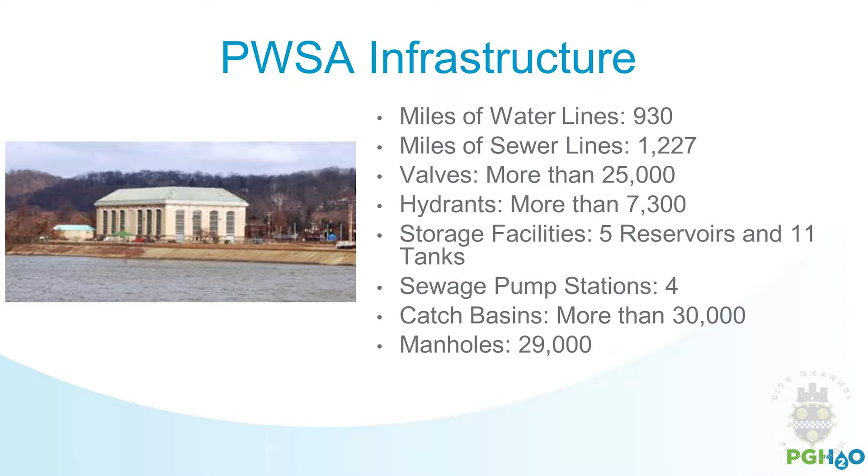Just want to give an idea of what kind of infrastructure, what quantities we have. We have about 930 miles of water line, about 1,200 miles of sewer line, more than 25,000 valves, more than 7,300 hydrants, storage facilities with 5 reservoirs, 11 tanks, 4 sewage pump stations, over 30,000 catch basins, and 29,000 manholes.

A couple things I'd like to point out from this slide. There's only one main treatment plant for the city, in Aspinwall. We also operate Millvale. That's pretty good planning way back when, 100 plus years ago, when the city was laid out and this plant was designed to feed the city. One major treatment plant - that's good planning.

Also, sewage pump stations - there's only 4. That means the original planners took advantage of gravity, took advantage of all our contours and hills within the city. Basically, if you eliminate pumps and use gravity, you save on electric costs. One of your 3 biggest costs with the utilities is electricity.

Now, don't get too scared with the slides. It is more for me to talk from.

Our engineering department right now currently has about 84 projects moving through the department in some form, some phase. Some are completed, a lot are in construction, some are just beginning. We have a staff of about 24 people, so I'm very proud of our staff and the amount of work we actually manage going through there.

About 36 projects are in construction, 4 are just beginning, and 23 are in closeout. Now, Joey's already mentioned funding sources - I'd like to talk a little bit about that. 44 of our projects are funded from bonds, and Mr. Tolbert talked about bonds. Other forms of funding include developer funding. Especially with all the development going on right now, 24 of our projects are developer-funded projects.

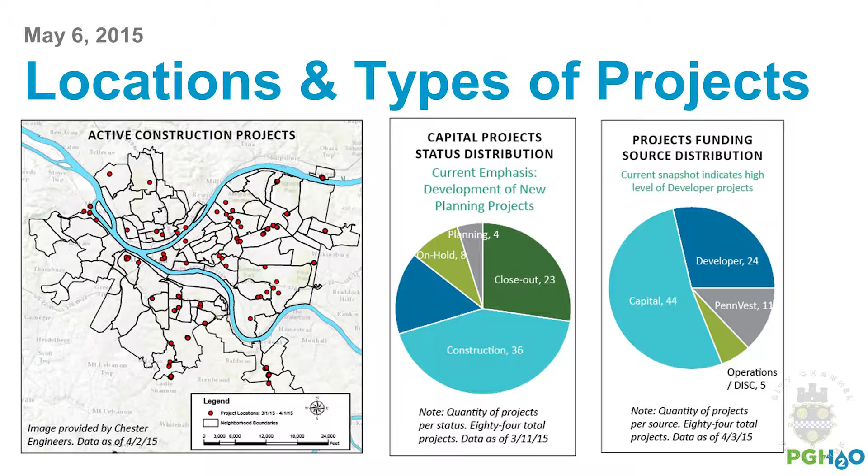Sewers - I've got a slide a little bit later in this presentation that'll show you some criticality measurement, if you will. But sewers are also age and location, but also volume - is this a particular area that's having problems? We'll take a look at it, because a lot of areas have basement backup issues within the city that we look to deal with, so that does drive a lot of our sewer projects as well.

Our capital improvement program is a 5-year program. Please don't pay too much attention to the graphs, it's more for me to talk from.

$50 million a year is still hundreds of years of replacing the system, so we need to look to ramp up, but $50 million is more than we've ever done before. To give you an idea of the overall magnitude, by the end of 2019 we're about $430 million invested back into the system. So we are very proactively looking at bringing the system up to standards.

Also, what comes into play is alternate funding and grant programs we've been taking a look at—how can we bring the system into, say, a 100-year replacement cycle where we look for the end of life of a pipe. Once again, these are all problems that utilities have to deal with.

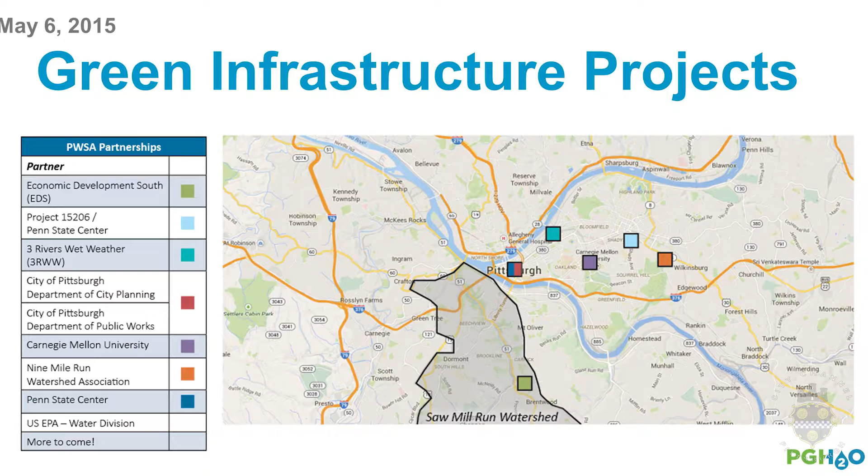This is a big topic that's moving forward, and it's definitely an approach to solving some of our problems. I'll talk about one project with green infrastructure, and I hope not to steal James' thunder too much: the Maryland Avenue, Shady Side area.

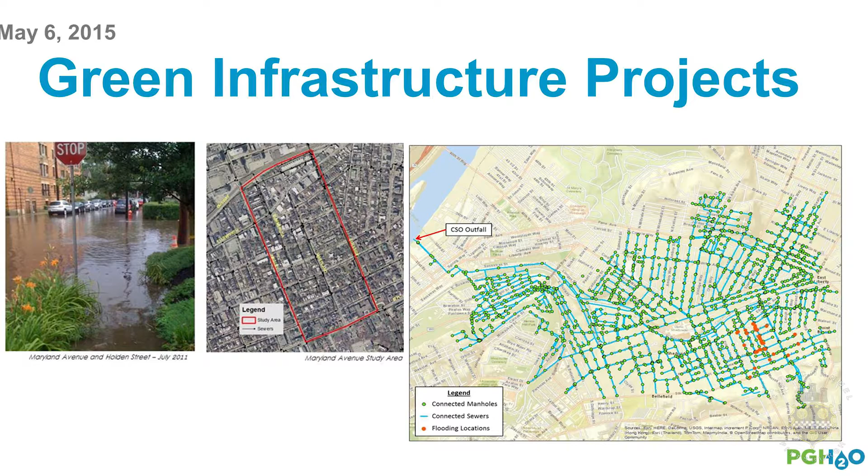We looked at basically the boxed area in the middle picture there. Part of the problem is no matter what we do, we can renew the sewers, we can make the sewers larger, but there's too much water falling too fast in that specific area. You can't get out of that area without a major investment to go all the way to the river. So what do you do to solve this problem? One tool for doing that is green infrastructure, which James will talk about.

Just to summarize some of our projects: I mentioned our filter rehab project. We have a project at our Bruecken pump station with valve replacement. We have a SCADA project, the Supervisory Control and Data Acquisition System — basically remote control, remote data access of our various facilities and more updated control and data logging, allowing us to make better decisions and a more modern approach.

Clearwell upgrade — the Clearwell is right here in Aspinwall at this plant. It's very old, and it's something we're looking to address in the next 5 years.

We just finished a transmission main rehab on our 60-inch line. One good thing about this is we used trenchless technology — rather than digging up a whole sewer and replacing it, we look at lining it with some kind of lining, bag, or coating. It basically renews the sewer without having to excavate the entire pipe. It's much more cost effective, you get a lot of life out of it, and again we're trying to stretch the capital dollars. The rest of the projects are various pump station projects and water line projects.

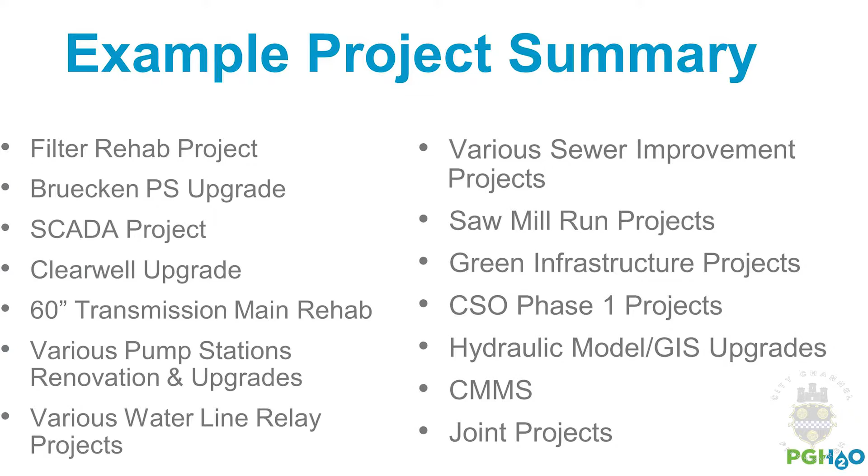Let's see — sewer improvement, the green infrastructure projects. I mentioned some of our consent order, sewer, wastewater spending later in our program — that's our CSO Phase 1 project. And joint projects: another thing we do for extending the funding as much as possible, especially in recent years, is looking at joint ventures. If the city or another utility is going into a street and replacing their infrastructure, we'd like to get in on that with them and share some of the work. If we're both in the same street at the same time, we could share some of the cost of repaving and redoing the street. So again, we're spreading the dollars as far as we can. Thank you.

My name is James Stitt. I'm the Sustainability Manager for the Pittsburgh Water and Sewer Authority. Part of my job involves just about everything that we do, because in some way, shape, or form I usually get pulled into something every day that's new and different.

What we're trying to do is incorporate this idea of sustainability throughout our entire system. We want to look at everything we do from a perspective of: is it cost effective? Is it efficient? Is it in the best interest of the people and the planet we have to deal with, as well as being economically sound and feasible?

A large part of my job involves stormwater management and green infrastructure, something Jim talked about a little bit earlier. You heard about the consent orders and consent decrees that Alcosan has, and the consent orders that municipalities have, basically demanding and requiring us to remove those overflows and reduce them from happening and contaminating our rivers.

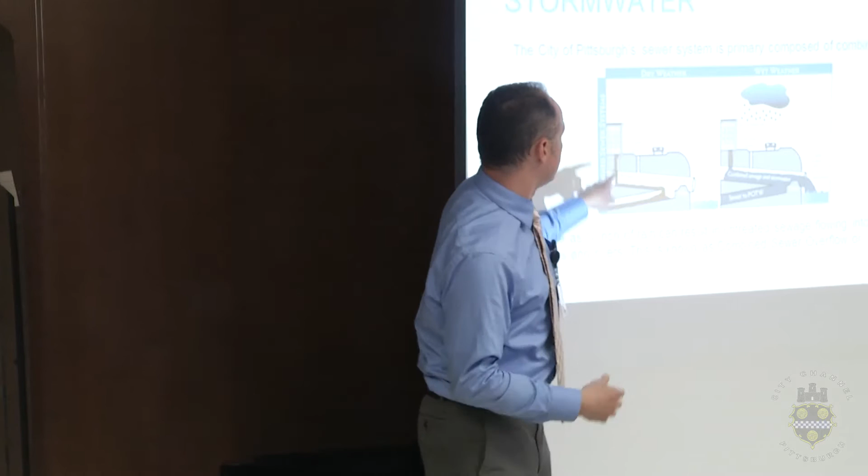On a normal dry day, the sanitary sewage that leaves your house drops down into your drain pipes, into the sewage pipes, flows along, and then makes its way to the treatment facility downstream. When we get heavy rains, that water collects on the rooftops, the roadways, the sidewalks, and then flows into the drains and catch basins along there.

If it's a heavy enough storm, that water falls into that same pipe and will overflow into the river, because this pipe on its way to the treatment facility no longer has any more capacity to carry any more water. That water has to go somewhere, and if this opening wasn't here at the river mouth, then this pipe would back up and that water would come back up into your basements or into your drains.

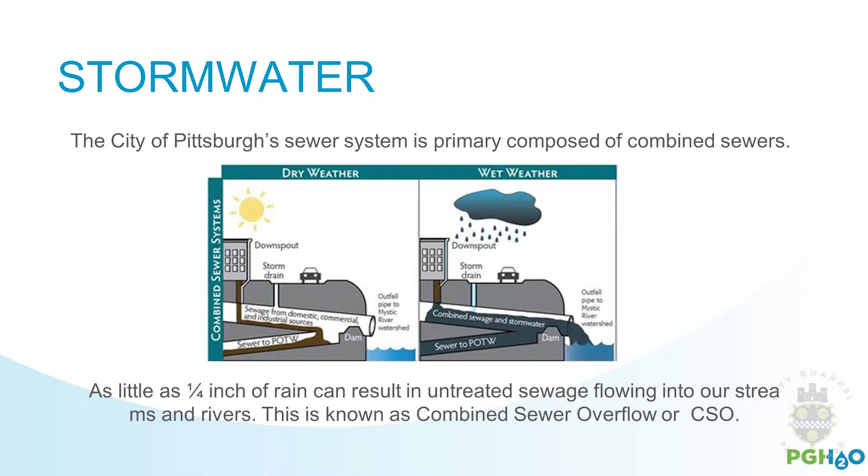So, problem with that, we end up with contaminated rivers that have E. coli and other bacterial pathogens in them. About 70 days out of the year, we will have this problem. As little as 1/4 of an inch of rain can cause a particular outfall to activate and dump sewage into the rivers.

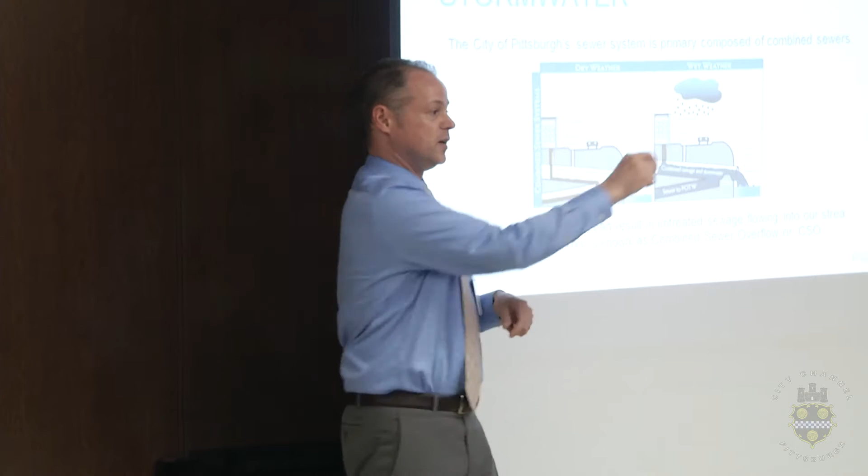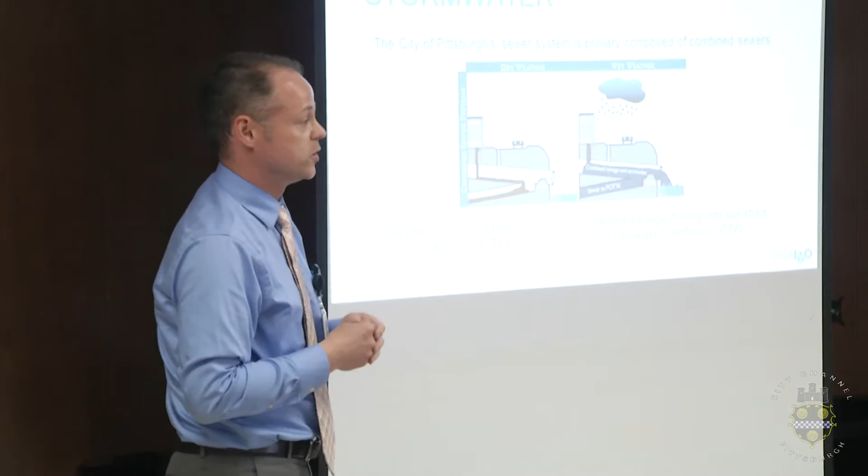You'll notice there's not a whole lot of sewage mixed with that stormwater, but it's kind of like the old vintner. If you're a winemaker, and you have a barrel of vinegar and a barrel of wine, you take one drop of wine and put it in the vinegar, it's still vinegar. But if you take one drop of vinegar and put it in the wine, you now have a barrel of vinegar. Same thing with the sewage - if you take one drop of sanitary sewage and mix it with that rainwater, it's now all sanitary sewage. It's all raw sewage. It's been contaminated.

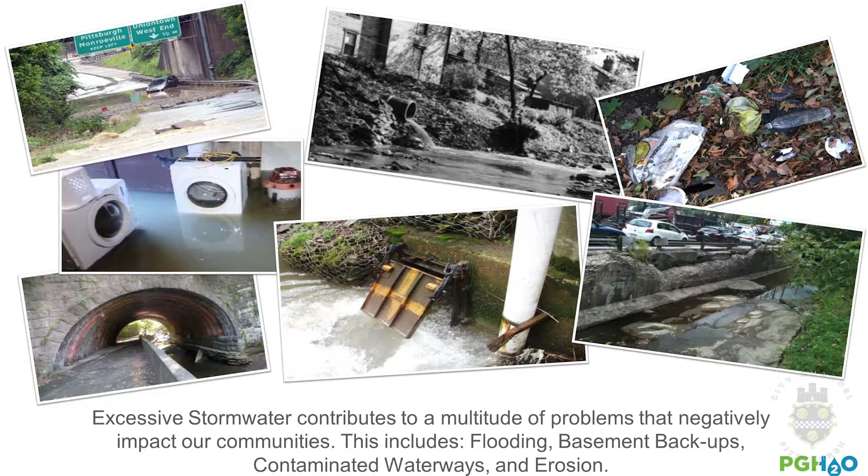So our job is to try and treat this, because what it causes is things like flooding and basement backups. This here is an outfall that's activating - that water is probably due to a rainfall earlier that day or occurring at that moment. This large gate will open up and just flow right out to the river. Then we end up with older pictures like this, showing how things were originally constructed. We've moved ahead of that, but still, when we get those heavy rains, we're still doing the same kind of thing, contaminating our waterways, if you would.

One of the things we want to try to do is keep that water from getting into the pipes in the first place. That stormwater falls from the sky, hits the ground, rolls across the pavement and the asphalt, and ends up in a sewer. We want to prevent it from getting to that sewer in the first place. So how do we do that?

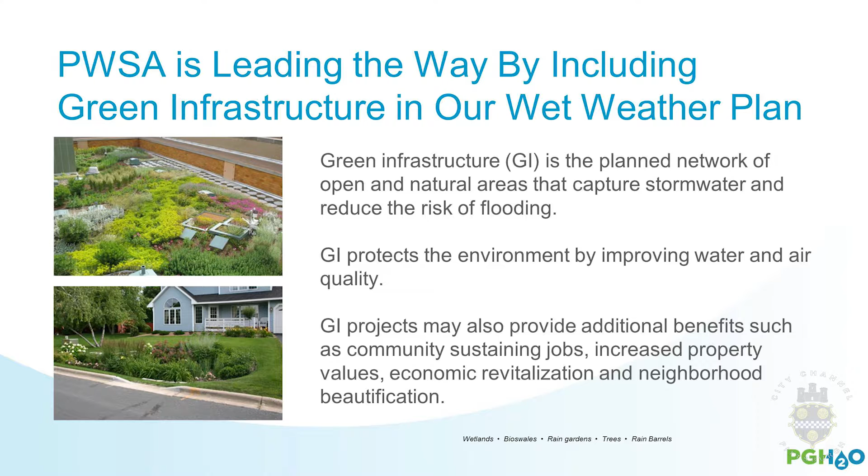Rooftops - we can do things like rooftop gardens and green roofs. We can do things in your yards like rain gardens, that kind of stuff. The green infrastructure helps us keep the rainwater where it falls. This is a whole new idea in stormwater management.

History up until the last decade or so was: stormwater is bad, bad for my building, bad for my site. When it falls from the sky and lands on the ground, I want to get it in a pipe and take it away as quickly as possible. Problem with that is, same lesson we learned with trash and recycling 25 years ago - when you throw something away, there is no away. It doesn't go away, it goes somewhere else, somebody else has to contend with it and deal with it. Same thing with that sewage and stormwater. It doesn't go into the pipe and then go away, it goes somewhere else, somebody has to deal with it. PWSA or ALCOSAN, or when we can't handle the capacity, the rivers get to deal with it.

This is a new approach, it changes the whole paradigm. We're going to deal with that water before it gets into the pipe. We're not going to take it away, we're going to figure out a way to handle it on site. So green infrastructure is going to help us do that in many different ways.

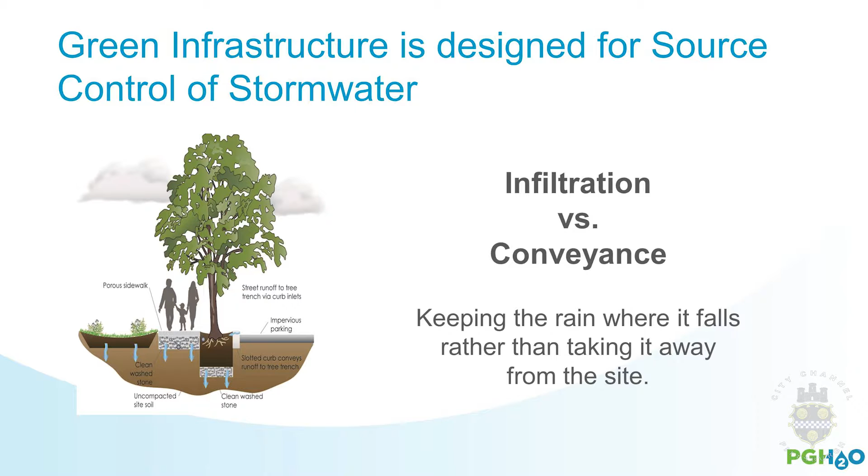Infiltration versus conveyance is the key to this. We want to infiltrate that water back into the ground and keep it in the soils where it falls, instead of putting it in a pipe and conveying it somewhere else.

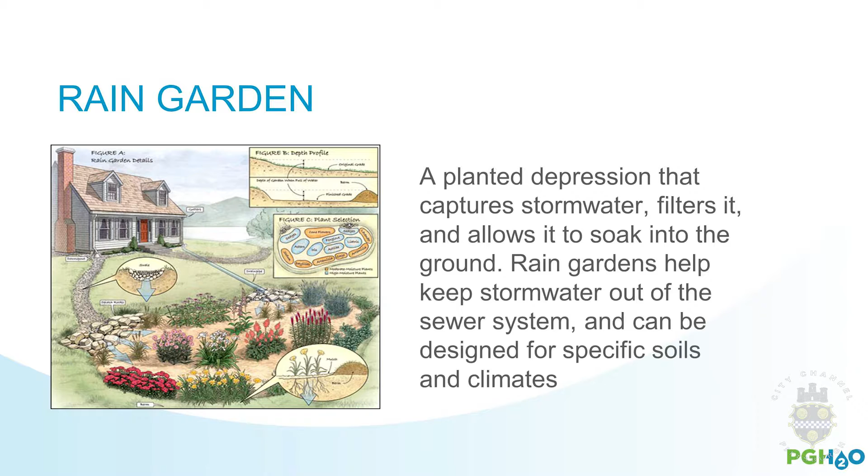One example here is a rain garden. This is something you'll see a lot of residential use for. Just like the rain garden we have out here, this was just planted last fall, so it's only now coming into maturity and getting the plants to start to flower. It's landscaping, but it's also a stormwater management asset. It works and it's engineered to work just like any other stormwater management facility. There is a purpose to the way this is designed, with the shallow depths and the runnels, and the way the plants are planted to soak up the water and use that water when it gets filled up.

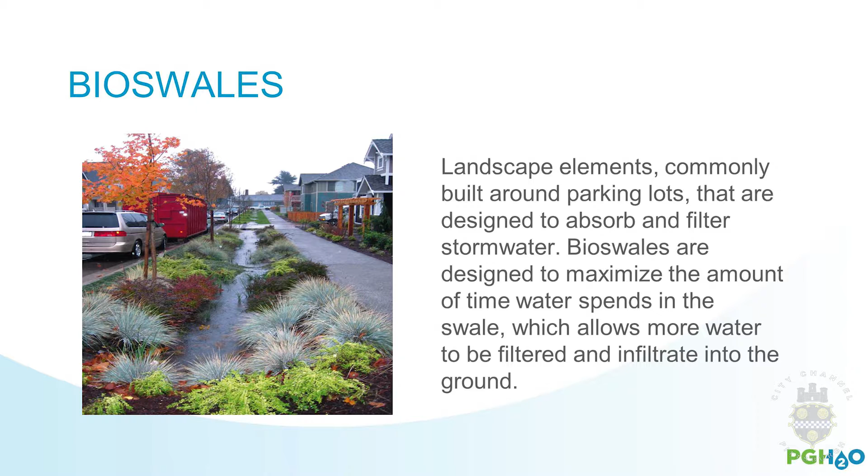Bioswales are similar to a rain garden—sort of like a long linear rain garden. This one here is taking water from the sidewalk as well as the street. During a rainstorm, this channel fills up with water. After it rains, all of these plants soak up that water, drink it up, and evapotranspirate it back into the atmosphere. What they don't drink up gets soaked into the soil and absorbed back into the ground below.

This is an example of a bioswale down in Greenfield. I'm trying to think of what's across the street... Big Jim's, right? Everybody knows where Big Jim's is. This is across the street from that.

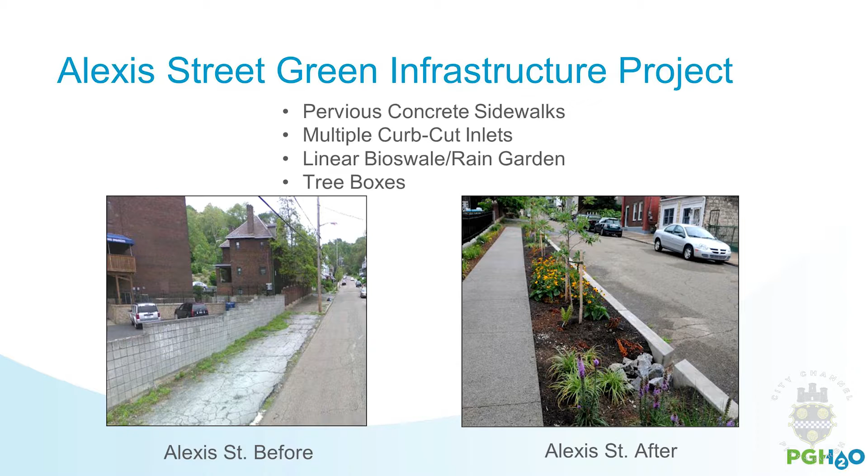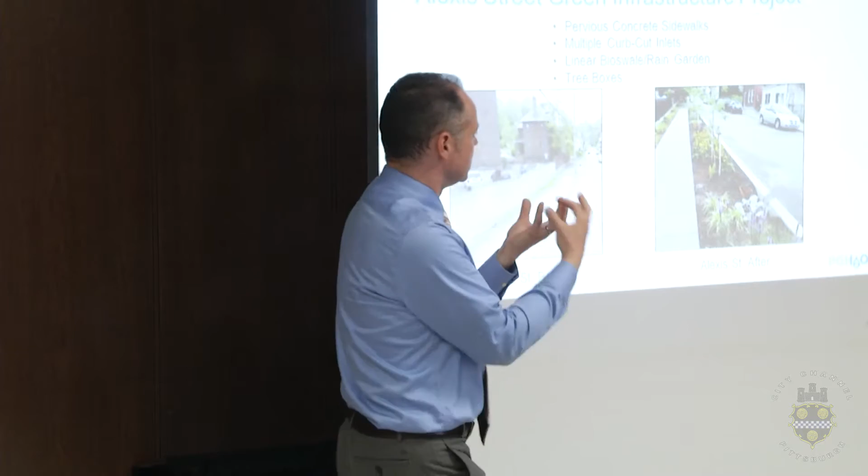This is what it looked like before, then they came in with this porous asphalt, or porous concrete. Rather than pouring concrete with fine aggregates and compacting it fully smooth, it's coarser aggregates that are less compacted. They act like an open pore mesh that allows water to filter through, and then there are plants on the other side, and trees as well.

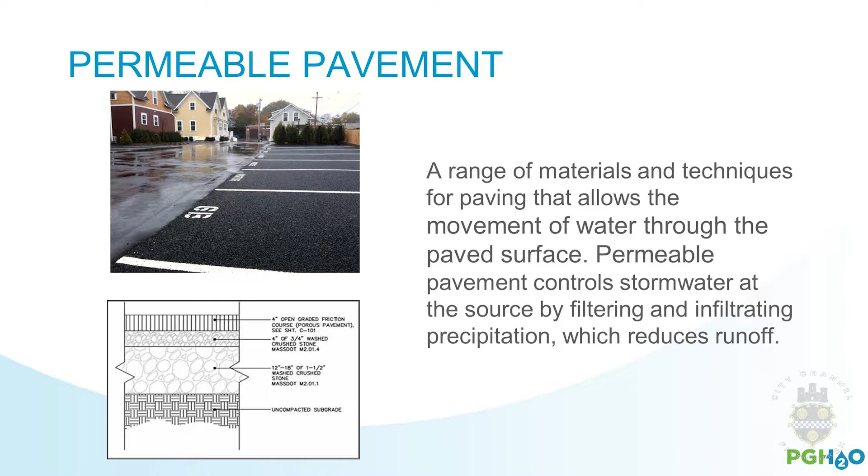This is porous pavement. You can see here during the rainstorm, this side is the porous side, and this side is the regular normal asphalt that's been rolled completely flat. On this side the water soaks in and through; on this side the water can't go anywhere, it has to run off and find somewhere else to go.

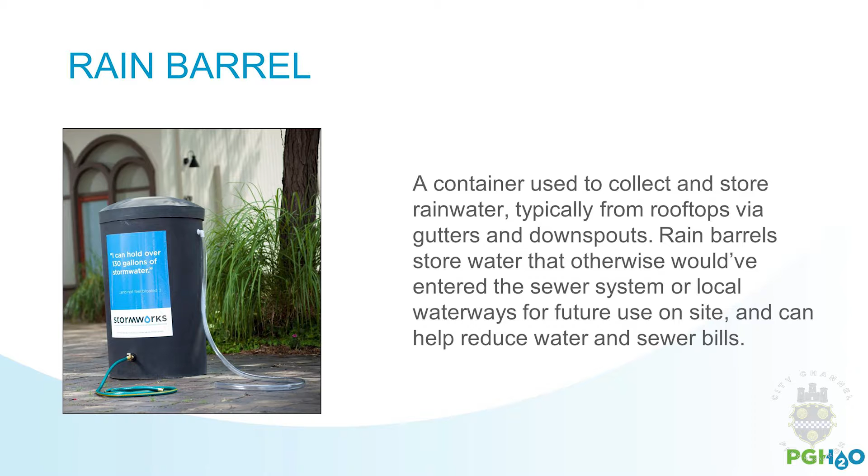This is a rain barrel that a lot of homes have connected up to the downspouts and the gutters on the corner of the home. They're great, they capture a lot of roof water runoff. Key to rain barrels though is what's going to happen after a couple of rains—it's going to fill up, right? So you've got to drain it, use that water, remember that it's there. If you hear on the weather report that there's a rainstorm coming, go check your rain barrel, make sure it's empty or at least drained down so that you have the capacity, so that water doesn't divert back to the gutters and the sewer pipes.

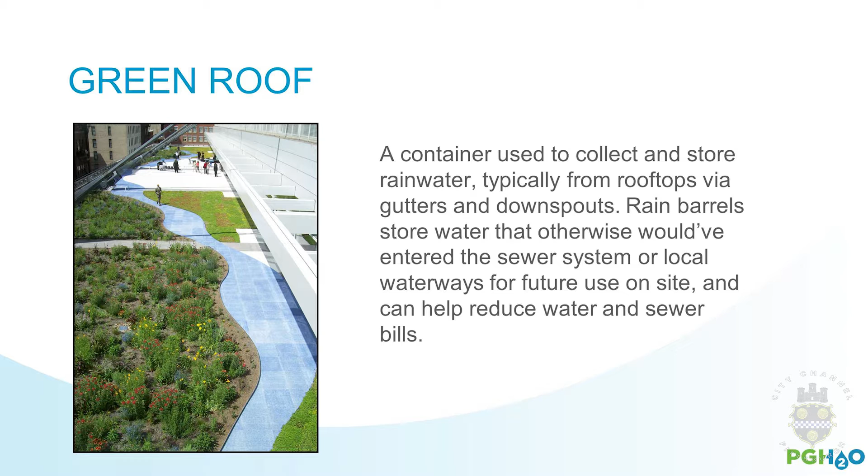Green roof, I mentioned earlier—this is another way to capture rainwater on the building by using soil media, and a lot of this media is very lightweight planting soil. It's not necessarily like heavy clumps of dirt that you're putting up there. It's more like vermiculite and some of those other mediums—it holds a lot of water. You can get a wide variety of plants, grasses, and other things.

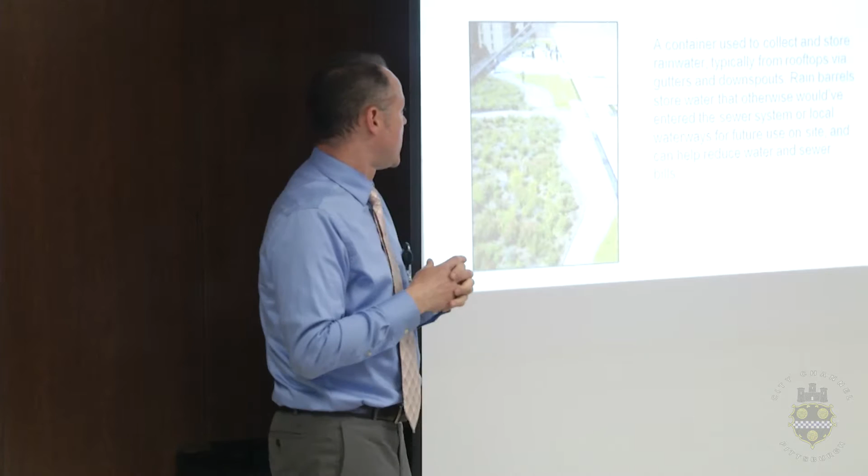This was part of the David Lawrence Convention Center. This was an all smooth concrete patio that they really didn't have any plans for, weren't going to do anything with. They came up with a design for a green roof with this pattern on it, and now this is a prime spot for receptions, parties, and a lot of events whenever they have conferences there. They get a great deal of use out of that space.

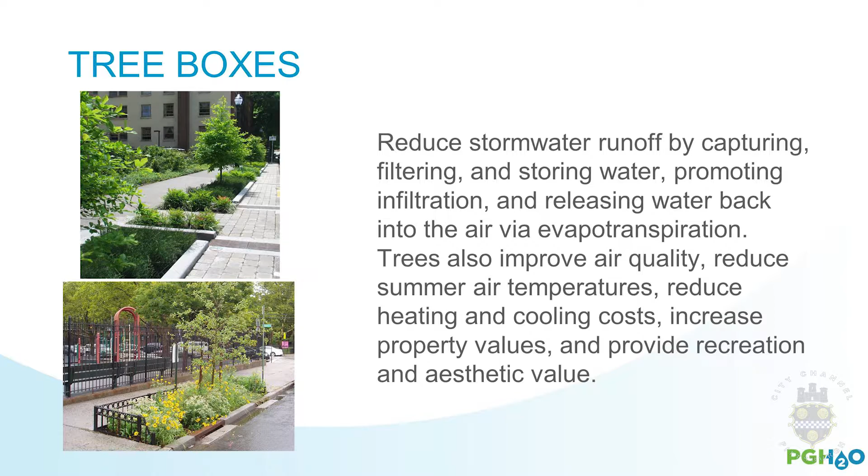Some other things are trees and tree boxes. Trees are what we call the stormwater rock stars, because the bigger the tree gets, the more it drinks—the more its roots spread out, the more water it can suck up. New York City and some other cities have standardized tree pits with an inlet and an outlet. Water goes in, falls in, and if it gets filled up too full, it just overflows right back out to the street and continues on its way. These are other examples of a similar type idea, incorporated into the normal pedestrian pathways, sidewalks, and streetscape. It doesn't really change much, but it does improve the look and feel of the street, making it much more comfortable and happy to walk down than something completely covered with asphalt and pavement.

This is our goal at Pittsburgh Water and Sewer Authority. I mentioned we have about 70 days every year when we technically shouldn't be in contact with the rivers and waterways. Our goal is to eliminate that, so that we can come in contact and have access to our rivers and waterways—all three rivers—365 days a year.

We've seen a lot more increased activity along our waterways. I don't know if any of you are kayakers or boaters. Allegheny County has the largest inland boat registration of any inland port. So other than the coastal areas along the oceans, we have more boats here than any other city in the country. We also have a lot more people with kayaks. We had the rubber duck a couple of summers ago that brought people out in droves.

The buildings in the city now, everybody's sort of turning to face the rivers, whereas in the past we had our backs to the rivers. Nobody wanted to do anything with the rivers. They were dirty, they were disgusting, nobody wanted to deal with them. Well, we've changed all that.

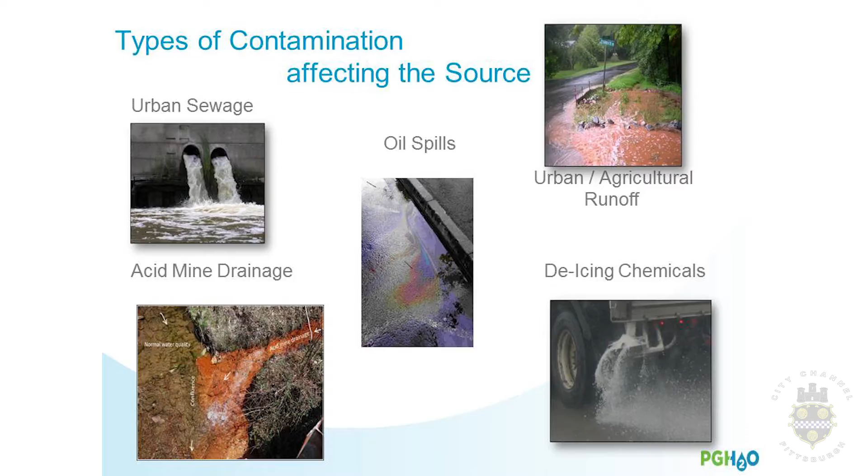We see oil spills - sometimes we'll get oil sheens on our rivers - and then runoff. In the winter time, we call it the big melt. We notice turbidity levels in the rivers increasing because of all that. The salt that they're using on the roadways gets flushed and goes into our rivers, so that's another source of contamination within the rivers.

So what can a utility do to make sure that they're being protected against all the contamination or threats that could potentially contaminate our rivers? Well, then we would implement what's called a source water protection plan.

The PWSA has a source water protection plan. We implemented it in 2010, so we're coming up on our 5-year anniversary. What does a source water protection plan do? You can see the list of good things it does, but primarily it's keeping an eye on potential polluters upstream from a utility, making sure public health is always maintained, and that it's protecting main waterways and tributaries.

In fact, there are ordinances in place to help a water utility go to a potential polluter if they are deemed to be polluting, to help stop that from happening so that our source is better protected.

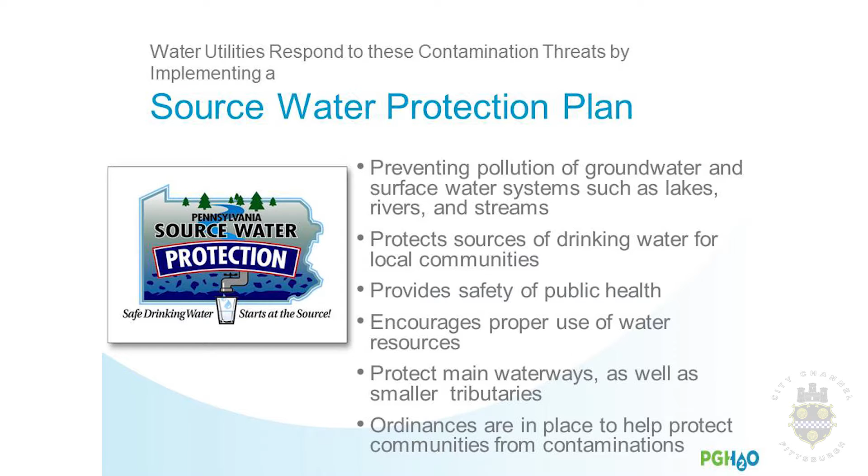Another way PWSA implements this source water protection plan is by belonging to source water protection organizations. We belong to the River Alert Information Network, which has monitoring stations, early warning spill detection networks along the Allegheny, Youghiogheny, and Mon rivers, monitoring water quality data in real time - primarily conductivity, pH, and temperature.

We're also members of ORSANCO, the Ohio River Valley Water Sanitation Commission, which has an organic detection system at the headwaters of the Ohio and all along the Ohio River. They're looking for volatile organic compounds or substances derived from gasoline products, oil products, things like this. They also have a team of experts that help.

EPA and DEP recommend water quality standards for your NPDES permits, industrial waste discharge permits, and things like this. So we're proud to be members of those organizations.

This is an example of one of the rain monitors. When you go on the tour, you'll see in the lab the rain monitor we have over by the fish tanks, and again, we're checking for conductivity, pH, and temperature.

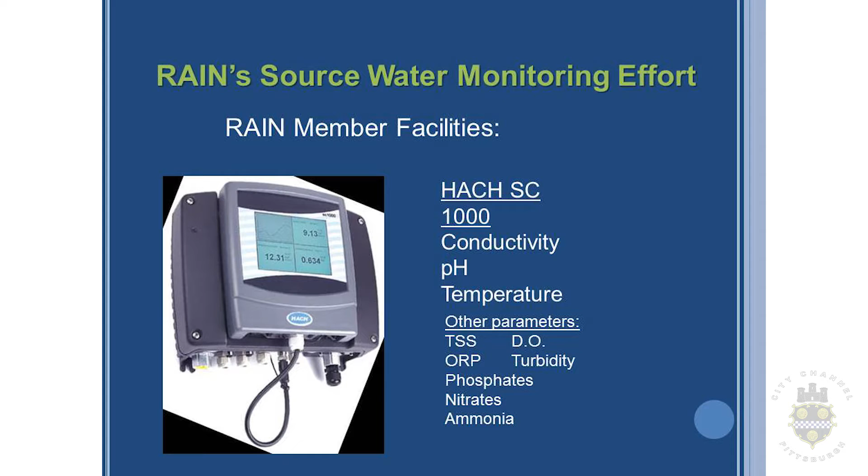Some other expanded source water panels can also test for total suspended solids, dissolved oxygen, turbidity, ammonia, things like this. These are good things to know what you're bringing into your plant, so you know how much treatment chemicals to use to mitigate any potential risks to the system.

As the Pittsburgh Water and Sewer Authority, we use a multi-barrier approach to make sure we're providing safe drinking water. As mentioned, we have our source water protection plan. When you tour this, this is a conventional filtration plant, and we employ clarification, which involves coagulation, flocculation, and sedimentation. You'll actually be able to see that in action when you walk through the plant.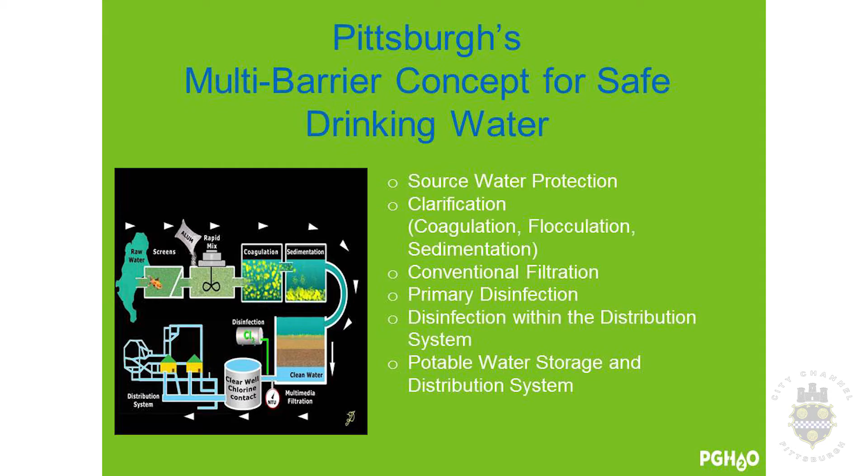We also have conventional filtration, which is that rapid sand filter, those rapid dual media filters that Bob was talking about earlier - you'll be able to see those. Disinfection is something we're using; we use sodium hypochlorite, or bleach, chlorine, as our primary disinfection. We also make sure disinfection is carried throughout the distribution system, so we're maintaining safe residuals out there. And then we also have various storage facilities for our water.

So what's driving this? Not only do we want to make sure that we're putting out the highest quality and safest water possible, but we're also under regulations to do so. As you can imagine, tap water is actually more regulated than bottled water. Well, this bottled water comes from our membrane plant, so it's safe. The EPA does federal regulations that we have to follow, and the state DEP will enforce those regulations. Then the Allegheny County Health Department will inspect the facilities. So you can see we have a wide range of regulations that we need to follow and agencies that we need to comply with.

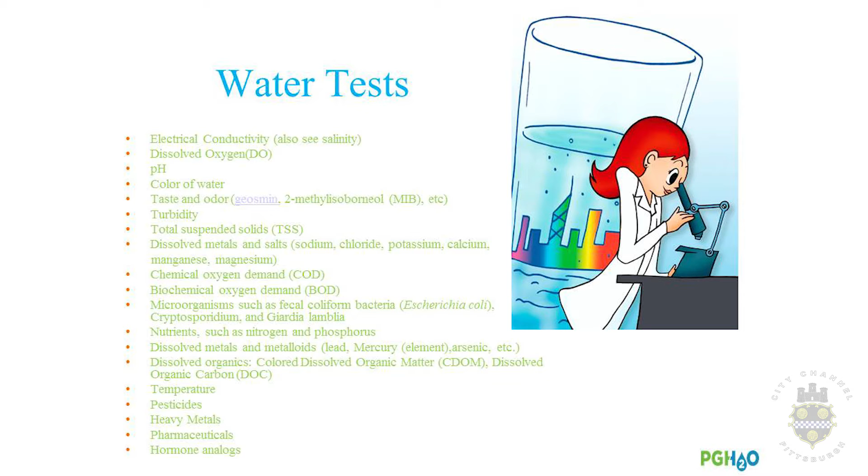So these are various amounts of water tests that we do on an annual, daily, and monthly basis. Some of these we'll talk about in more detail. Some are for the drinking water side of things, and some are for non-potable source water or wastewater that we conduct in-house or send to a contract lab.

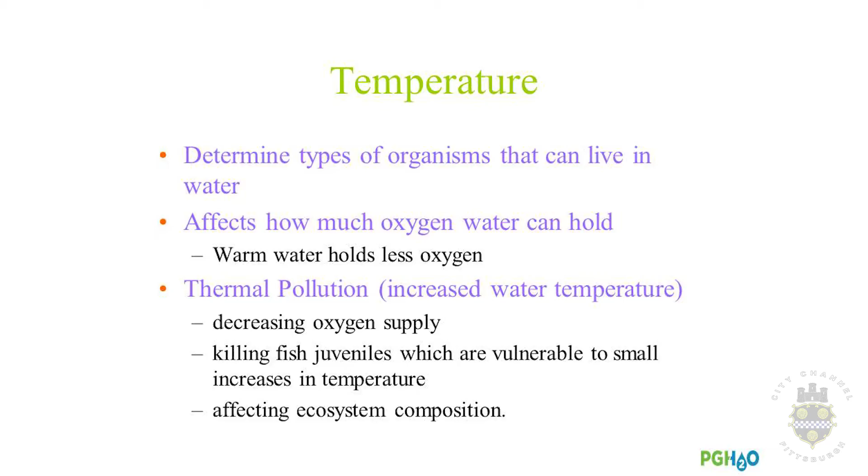So some of the ones we'll talk about: temperature. We talked about temperature's effects on how much oxygen the water can hold. We always get calls in the winter that people have cloudy water when they turn their tap on and get a glass of water. That cloudiness is a direct impact of the temperature variation from the water being pulled into the main to the warmth inside your home. We tell them that's actually just oxygen, and if you set it on your counter, those bubbles will dissipate and the water should be clear. So temperature is a parameter we're looking at.

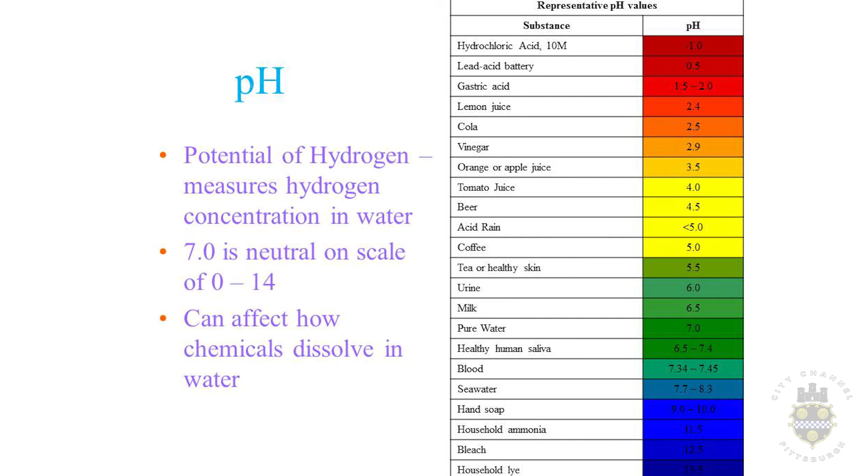pH, of course—water is all about pH. We use pH as a driver, not only at the front end of the plant, because we need the right pH for coagulation to happen, but also on the distribution system. As mentioned numerous times, we have old infrastructure, and some of those lines are made of lead, and we don't want that lead to leach off the pipes, so we're under a corrosion control permit and have to maintain a strict pH. We actually maintain a pH around 8.2 to make sure that lead isn't being leached off those pipes.

We also test for microorganisms at the front end of the plant as an indicator organism for the health of the river, and also out in the distribution system to make sure there's no infiltration into your drinking water lines and that we have adequate disinfection. So we're checking for things like E. coli, and then Cryptosporidium and Giardia. Cryptosporidium and Giardia are pretty robust protozoa. Cryptosporidium isn't something that can be deactivated or killed using chlorine, so we test vigorously for this under the long-term LT2 rule, the Long Term 2 Enhanced Surface Water Treatment Rule. That's another reason for upgrading our filters—to make sure we're removing any potential contamination.

Also, turbidity. Turbidity is a measurement of particles and cloudiness in the water. Throughout the entire treatment process we're checking for turbidity, total suspended solids, and things like this, because we want to remove as much as we can at the front of the plant so we don't clog up our filters and can sustain more life out of them.

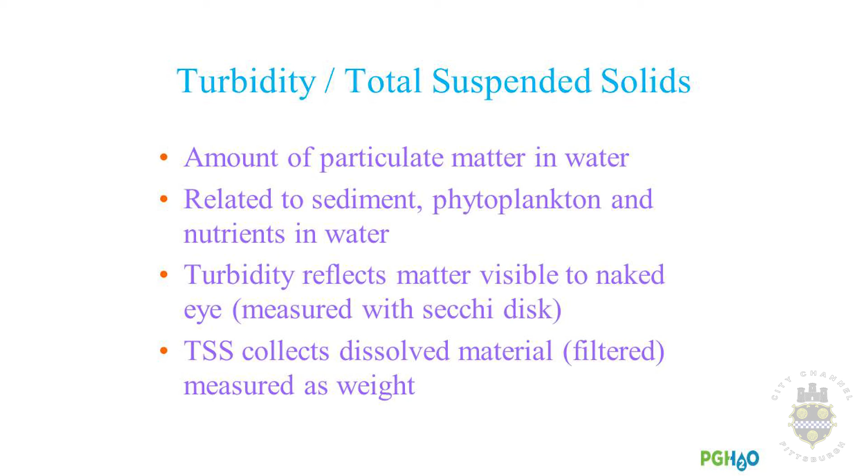And then heavy metals. We have a lot of metals in the rivers because of industrial activity, so we check for things like iron and manganese, lead and copper out in the distribution system. All these things play a role in what we're looking at, again, to make sure we're providing high quality water.

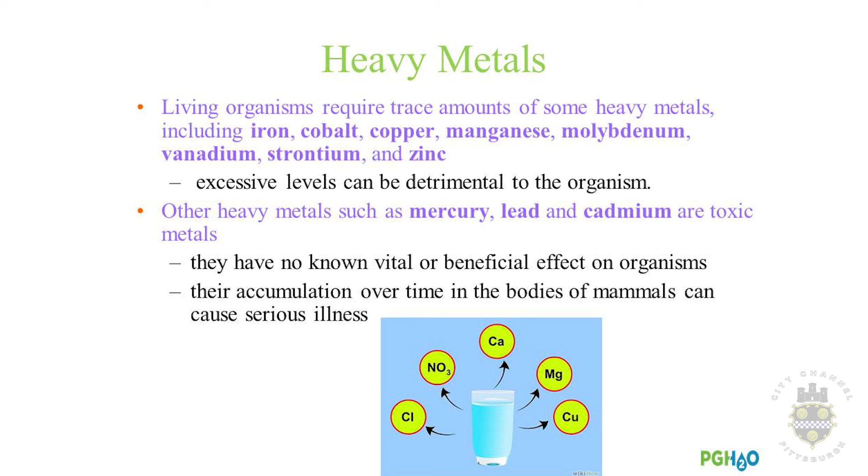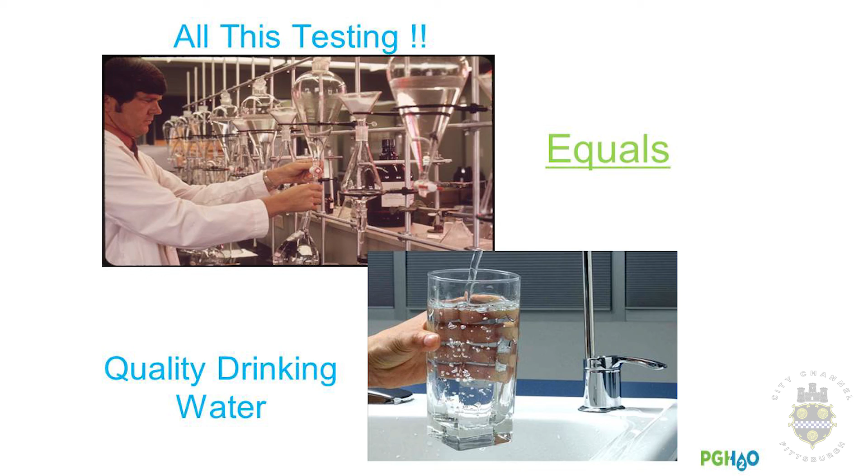So my last point: all of this testing we do equals quality drinking water for you at the tap. We care about what's being drawn into the plant, we care about how the water is moving through the plant, and we definitely care about what we're drinking. That's why we're in business—to provide the safest, highest quality water.